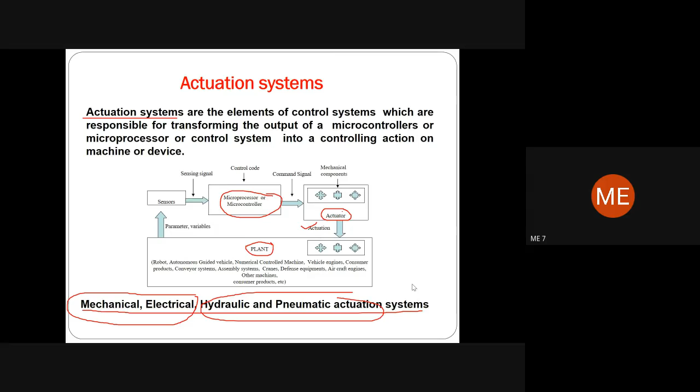Let's continue with the last class. In the last class, we closed off the integration chapter with the functional unit of a robot, then started with mechanical actuation system. Before that, we discussed the concept of the actuation system, what it means, and its various types. We then started with mechanical actuation system and discussed the concept of mechanism, which is nothing but devices called motion converters.

They transform motion from one form to another, for example from linear to rotary or vice versa, rotary to intermittent rotary, rotary to rotary, or linear motion to linear motion using linear joints. So basically, mechanisms are nothing but motion transmitters.

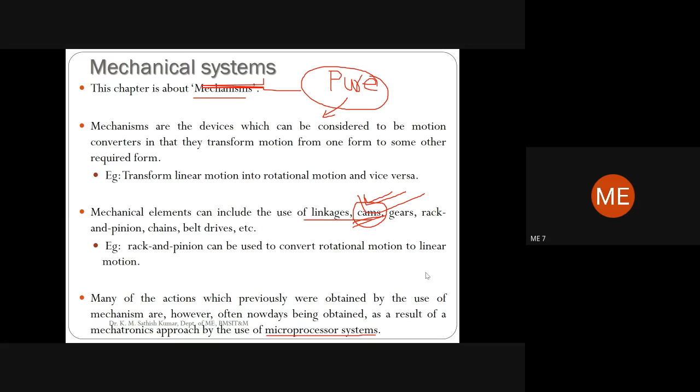Earlier mechatronic systems used to have more mechanical components, but with the invention of microcomputers, we started using microprocessors as controllers for mechatronic systems. We can also use mechanisms for force amplification, change of speed, and other purposes.

Now, when dealing with these mechanisms, generally there are two different cases: one is called kinematics, and the other is called dynamics. These are the chapters you studied in earlier semesters, called kinematics of machines and dynamics of machines.

Kinematics is where you study the motion of your mechanism without the application of forces, meaning without considering forces you study the motion.

On the contrary, dynamics mainly deals with force analysis. With the amount or type of force, the changes that happen in the mechanism structure are dealt with in dynamics. In kinematics, we will not consider forces.

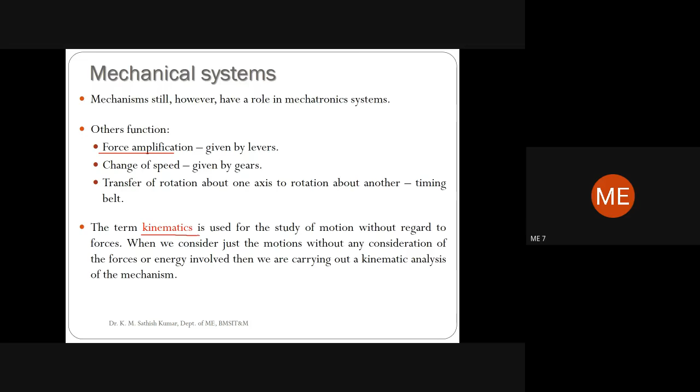Now about the difference between kinematics and dynamics: when we talk about motion in a mechanical system, the first thing is to understand the various types of motion that links or joints can have. This has been classified into two broad cases: translation motion and rotational motion.

Translation motion is movement which can be resolved into components along one or more of the axes. Next is rotational motion.

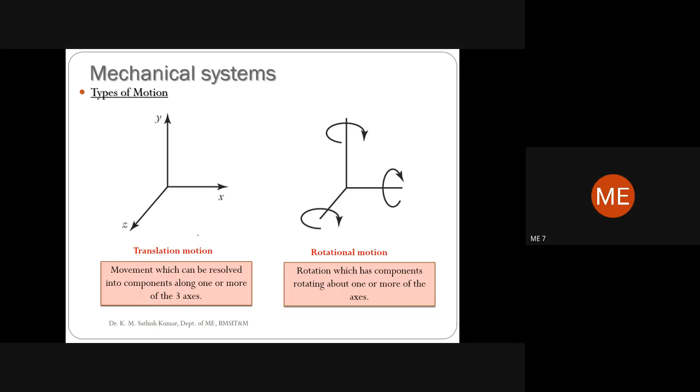Now, when it comes to degrees of freedom with respect to constraints: in a mechanical system, the basic aspect is the freedom and constraints you give for providing 6 degrees of freedom. The important aspect in design of mechanical systems is the orientation and arrangement of elements and parts. A body free in space can move in 3 independent mutually perpendicular directions and rotate in 3 ways about those directions.

That means in mechanical systems, what is important for us is the movement of the links in various different directions. These movements are called degrees of freedom, and each degree of freedom is dealt with in this section. Generally, it has 6 degrees of freedom.

The degrees of freedom is nothing but the number of components of motion that are required in order to generate the motion. How many components of motion are required? That is what is called the 6 degrees of freedom.

Then freedom and constraints. If you observe these two diagrams, we can observe the various different types of degrees of freedom. In figure A, we have x, y, z. All these degrees of freedom are associated with the linear system. In all cases, the links can move linearly from one point to another location. That is about the linear system.

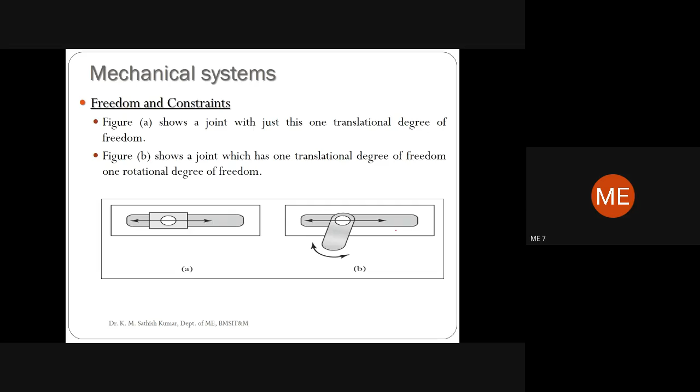Now with this approach, we'll try to go with what is called the kinematic chains. In the kinematic chains, we have discussed... right now we are just discussing the degrees of freedom, and then we'll try to understand what are called the kinematic chains.

In the kinematic chains, we have individual diagrams here which represent what are called the various links. We understood that a kinematic chain is mainly a motion transmitter - we transmit motion from one to another. Motion transmitter is the main important thing. When we are going to transmit the motion, how we transmit it is important - which member is used for the transmission of motion.

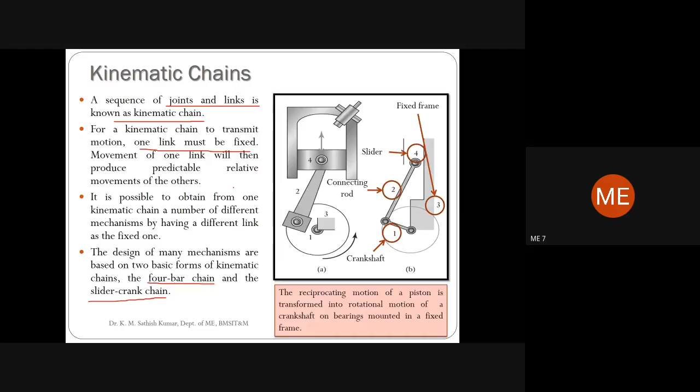Then we have what is called a 4-bar chain mechanism. In the 4-bar chain mechanism we have double lever mechanism, lever crank mechanism, and double crank mechanism. Now here, with reference to these links, there is one particular law which is associated with respect to this.

Can anybody recall that law? Depending upon the length of the link, can I get the linear motion or the translation motion, something like that? Can anybody recall? Let me check, we have 15 members... we have only 13 members. Can anybody recall what is called the law, which states about the length of the links? Some relation like the length of the shorter link compared to the length of the longer link. Can anybody recollect?

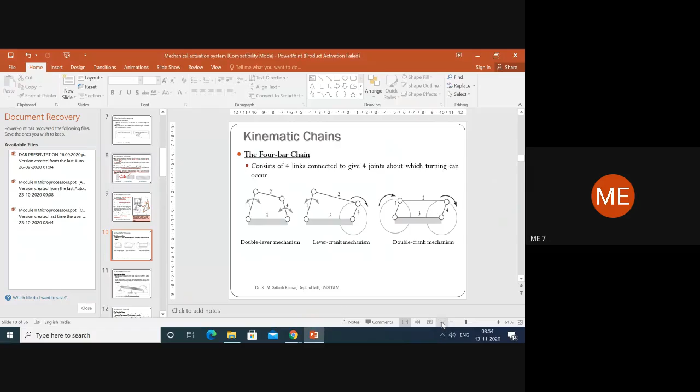Just to recall, we have the double lever mechanism. In this, lever number 1 and lever number 4, with any extent of movement, are fixed.

Okay, so lever 3 is going to be fixed. With any extent of movement, you can only have the translation motion. Only up till here you can come, meaning you can't have a rotary motion. That is because of the length of the link.

Now if you observe, 1, 3, 2, and 4. Here in the lever crank mechanism, 3 is fixed. With the motion, one can take a sliding motion, and 4 can take one complete turn. That means with this mechanism, 4 can take one complete turn - that is, rotary motion is possible, and this is going to be only translation motion. Then the next one is a double crank mechanism.

In the double crank mechanism, both 1 and 4 can take a rotary motion, provided the length of 2 and 3 is the same and 3 is fixed. Now based on the length of the links, you can have double lever mechanism, lever crank mechanism, or double crank mechanism. These are all the 4-bar chain mechanisms which are going to be present.

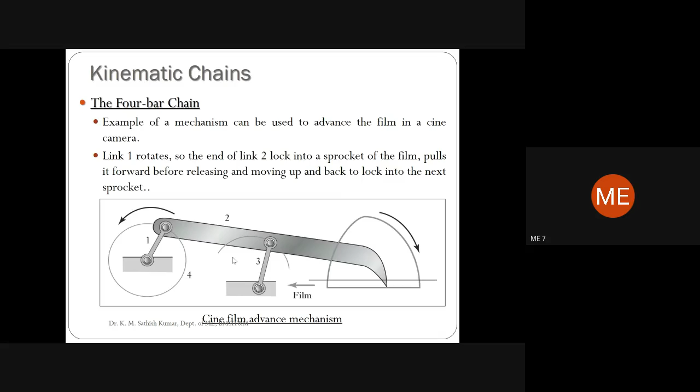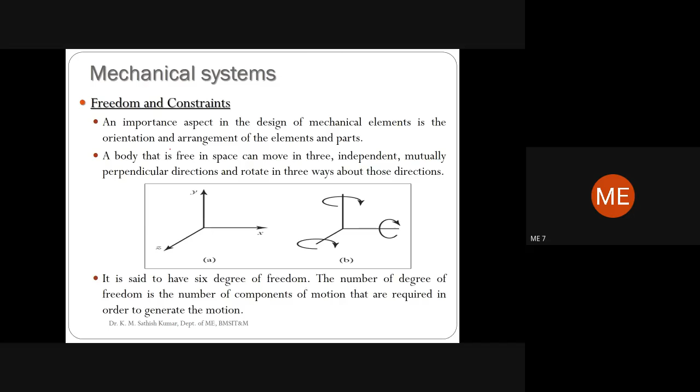So now these are the two different kinematic chains which are going to be present. When we discuss the kinematic chain, first remember about what is called degrees of freedom. Kinematic chains are links that can have any of the 6 degrees of freedom: 3 linear movements and 3 rotational movements. That is the concept of degrees of freedom.

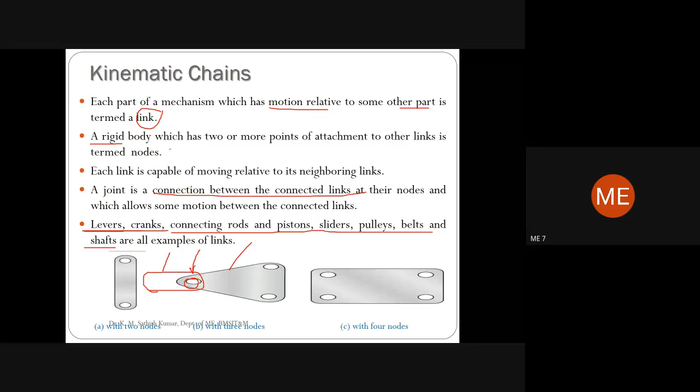Then the link should supposed to give the movement, which is through the nodes and through the joints. That is how the movement can occur, and how the links are going to be there.

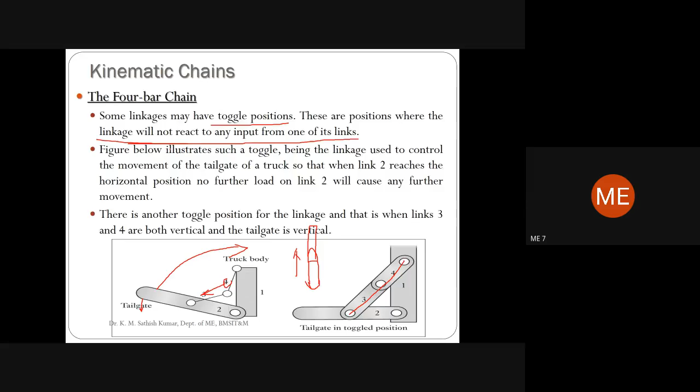So we have gone through with two different cases: the four-bar chain mechanism and the tailgate, that is the toggle position we have discussed, and then the slider crank mechanism. So this is one such actuation system, which are kinematic chains.

Now the other actuation mechanism, the mechanical actuator, which is more or less largely used for precise location or precise movement, is called the cam. Now let's quickly understand some issues regarding cams.

Now in this case we are not interested to draw the diagram of the cam. We are interested only to know what this cam is, and how we will be discussing it with respect to the actuation system. That's all.

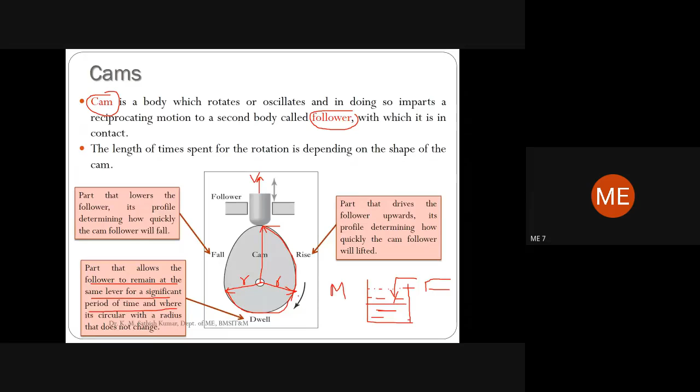Till what happens? Till the tank is filled. During this position you don't want to operate the valve. So now this dwell period is the one. If you consider the main wash cycle, only one activity I am talking about: the valve should be open. The valve starts to open at this point, and by the time it reaches here, it has completely opened. Now from here to here, that dwell period is where we want the valve to stay open till the water reaches the maximum level.

After that I want to close the valve. Now what is it that you are going to do?

You make the follower come down. When it comes down, it starts to close slowly. When it comes to this point, the closure is going to occur.

It is the start of the opening of the valve, up till here is the end of the complete opening. From this point to this point, the valve is still in the open stage. Now it has filled, and from here to here you gradually close the valve.

That is what is called the fall. The fall is the part that lowers the follower, and it's important in determining how quickly the cam follower will fall.

If you make the radius too steep, then the fall is going to be much quicker. So depending upon how fast you want to close the valve, you can design this accordingly, and how fast you want the valve to open, you can design the rise portion.

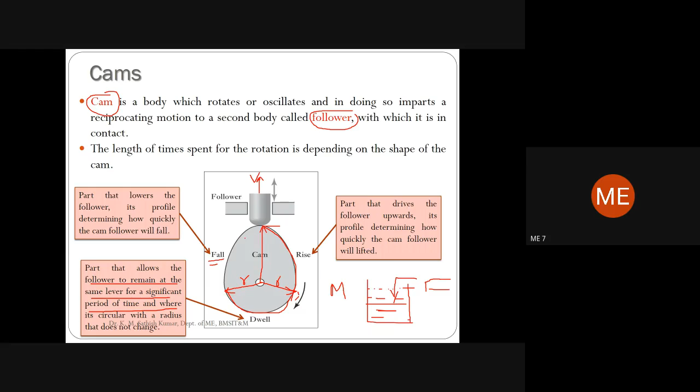Now we need to understand here, there are three portions: the rise, the dwell, and the fall. In the rise, the follower is lifted. In the dwell, the follower stays in the same position. In the fall, the follower comes back to the normal position, that is, it will fall. So these are the three cases which are going to be present.

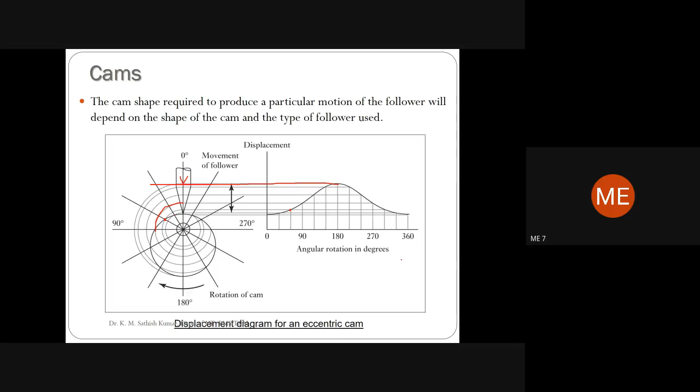Now we have different types of cams which are going to be there. Now I think I just have some point to discuss with you, that's why I'm just closing 10 minutes early now.